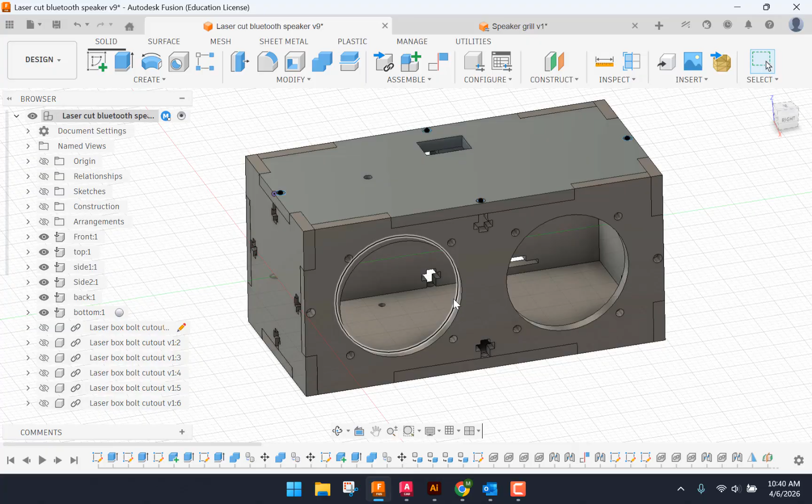We're going to have to use components, and we're going to use parameters to make it easier for us. So this is just going to show you what we're trying to aim for. In this first video, we'll try to cover drawing the front and the side here and getting it set up.

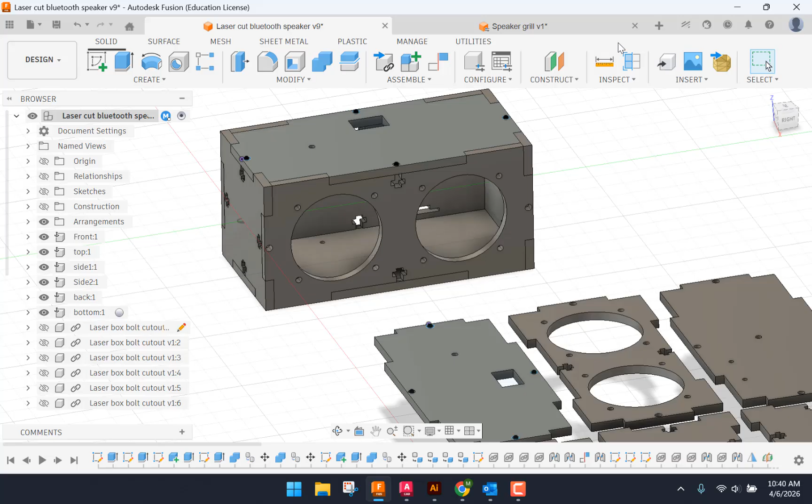So to start, we'll hit New Design and make sure we choose a hybrid design because we're starting a new part and we're making components. First thing I want to do is go to my configure. I'm going to hit OK.

I'm going to add parameters, which is this thing right here. So I'm going to add 3 parameters. The first one, I'm just going to go to plus, and I'm just going to type in ply. This is going to be 0.1875. That is just going to be the thickness of my plywood. And that way, anytime I need to use this, I don't have to type it in.

I'm going to add another parameter for the hole diameter of 0.13. I'm going to go ahead and add one more for the hole distance, and that's going to be 0.1. Not entirely necessary, it's just a nice little thing to make it a little convenient for us.

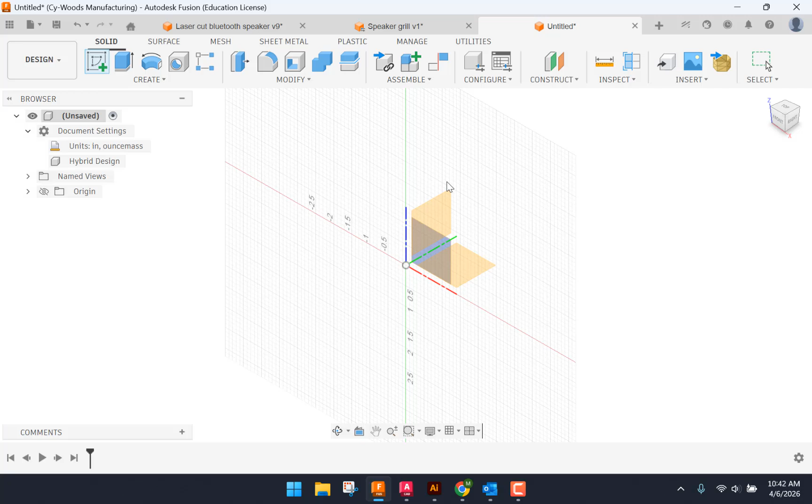So the first thing I'm going to do is start a sketch on the front plane, and I'm going to sketch out this side. The side is going to be a square, so I'm going to go ahead and use the center rectangle at the origin just to make sure I have symmetry. Go ahead and hit D for dimension, and I'm going to type in 2.875. I'm going to use that on both the sides.

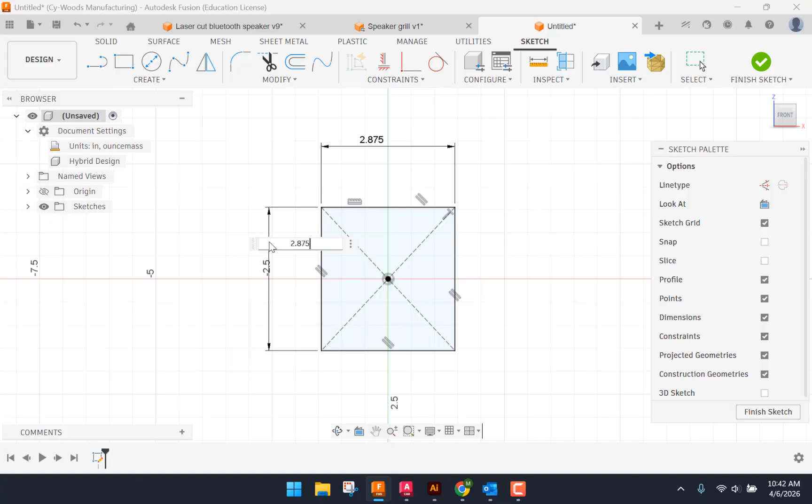I'm going to go ahead and make that little cutout for the box joints in a similar way. Center rectangle, and make sure you find the center point where when it shows that triangle, that means we found the center.

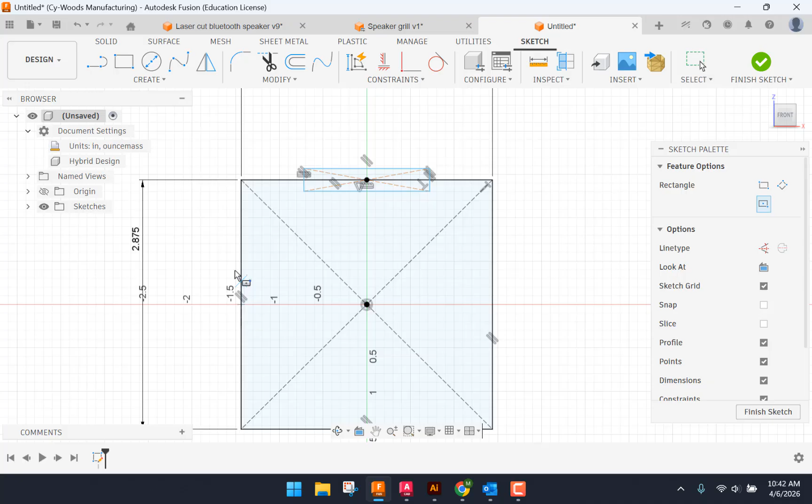I could do this a few different ways. I'm going to go ahead and draw it every time. I could have done a pattern or a mirror since it's symmetrical, but I'm just going to show how to draw it out. So I can hit D for dimension and make the top 1.5, and the distance from the square to the rectangle...

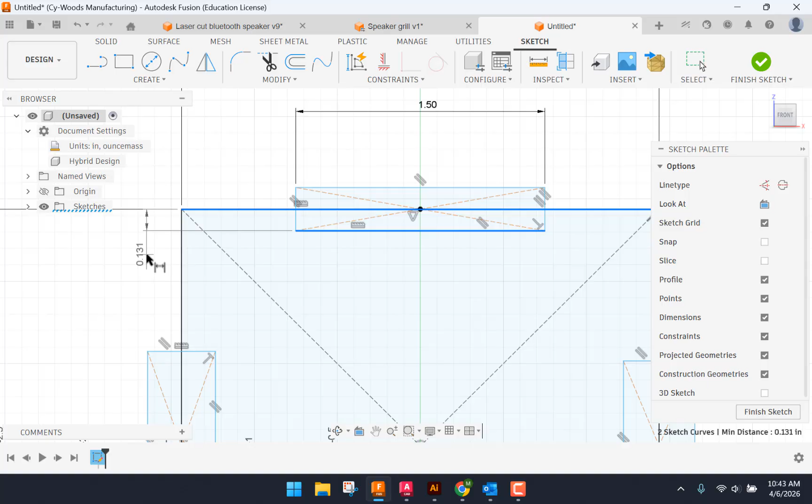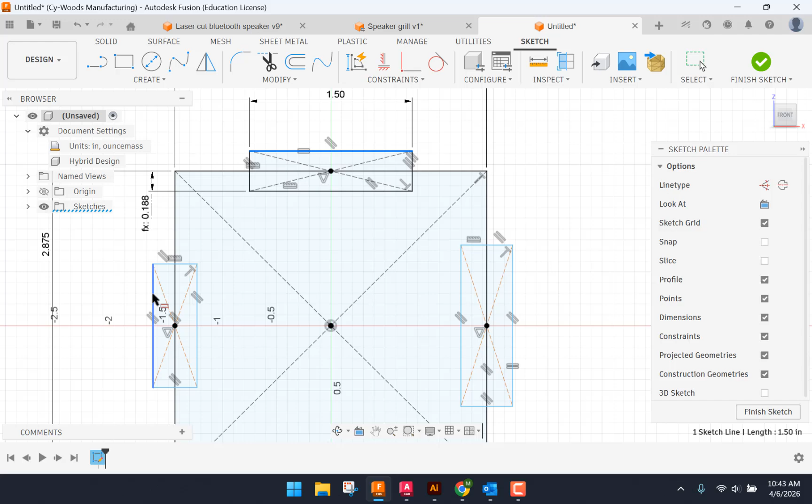Ply. So once I type in P, that pops up when I select it and hit enter. So I need all these to be the same. I can dimension each one similarly, or I can actually just go to the equal, and since this is a dimension, I click on that and I click on a non-dimension one, and they should all change to the same size.

Same thing with the side of the rectangle. I'm just going to keep referencing the top one to the other ones, and that should fully constrain my sketch.

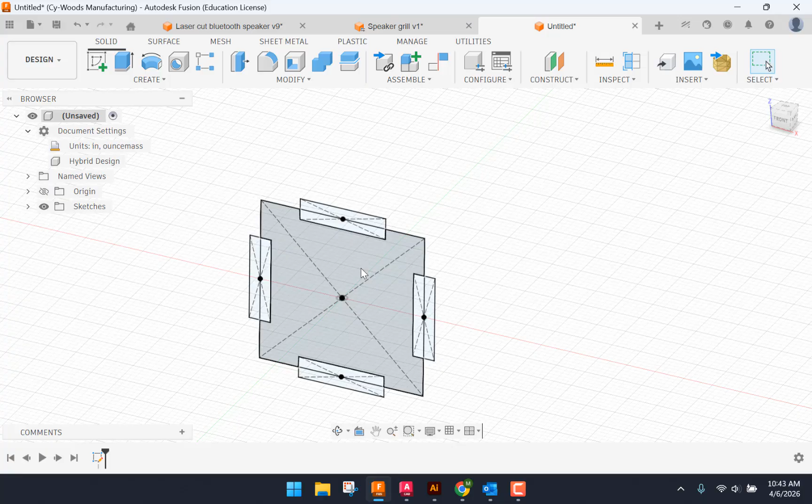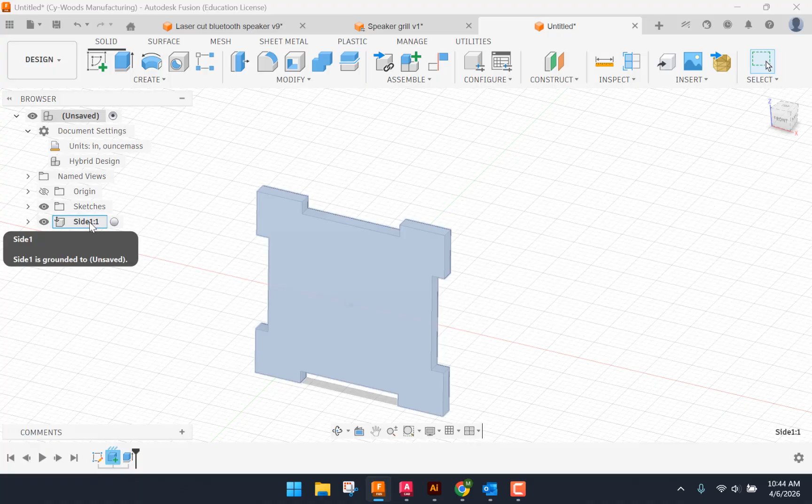Alright, I'm going to extrude this, just this middle part here, to ply. And I'm going to go ahead and hit New Component. So here I have my side. I'm going to go ahead and rename my component 1 to side 1. It's just good to make sure to name things so it's easier to navigate as we go forward.

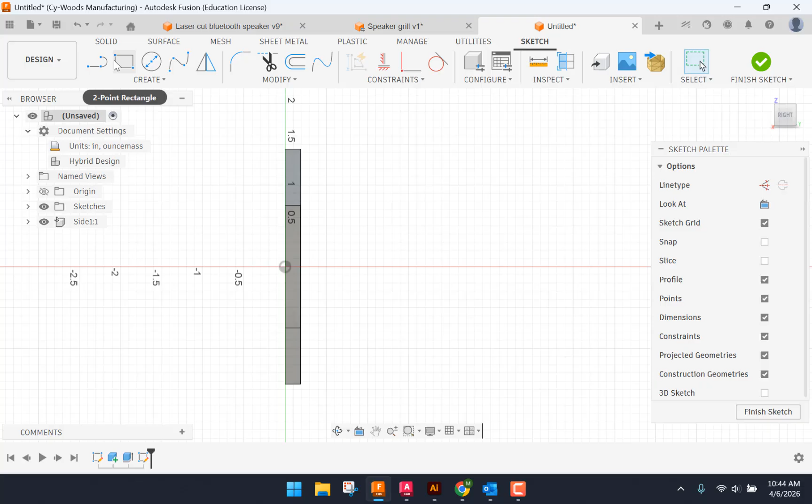Alright, next thing I'm going to do is sketch out the front. So I'm going to put the front on this face here. I'm going to hit Create Sketch and select that face. And then I'm going to do a 2-point rectangle. Make sure I go from this corner and that corner out.

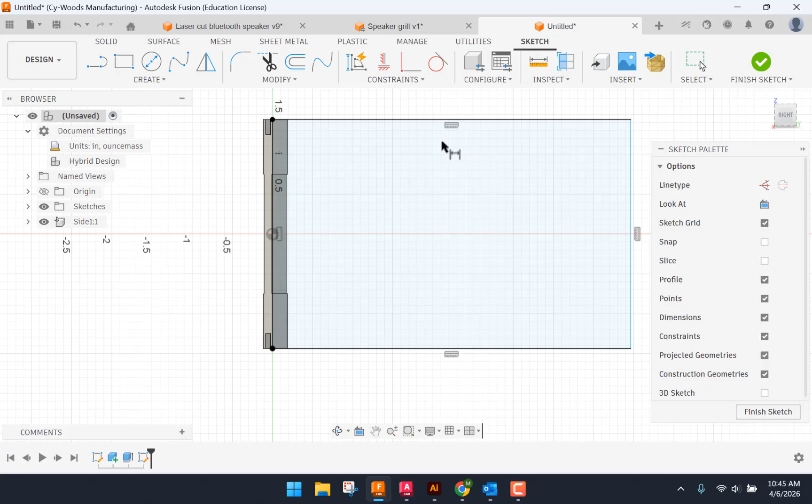Since I can't snap it to that corner, I'm just going to use the coincident constraint and put these two right on top of each other. I'm going to hit D for dimension and dimension this to 5.875.

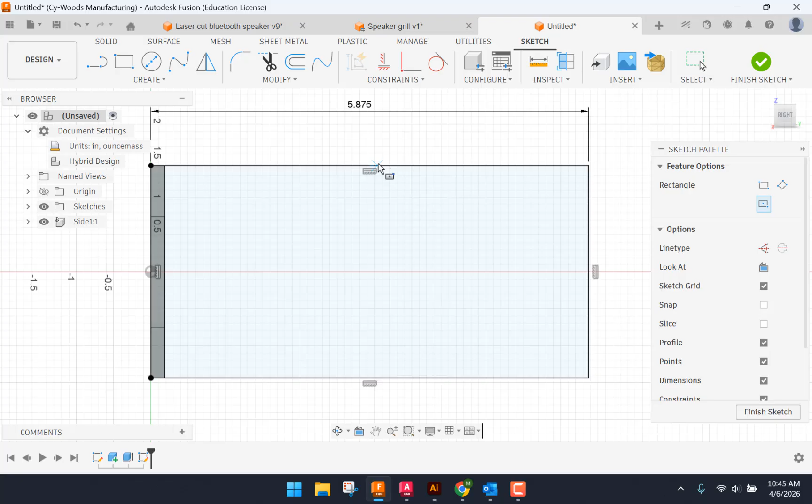Next thing I'm going to do is kind of a similar cutout. So I'm going to go to my center rectangle and make sure I select the midpoint. I'm going to do that on the bottom as well.

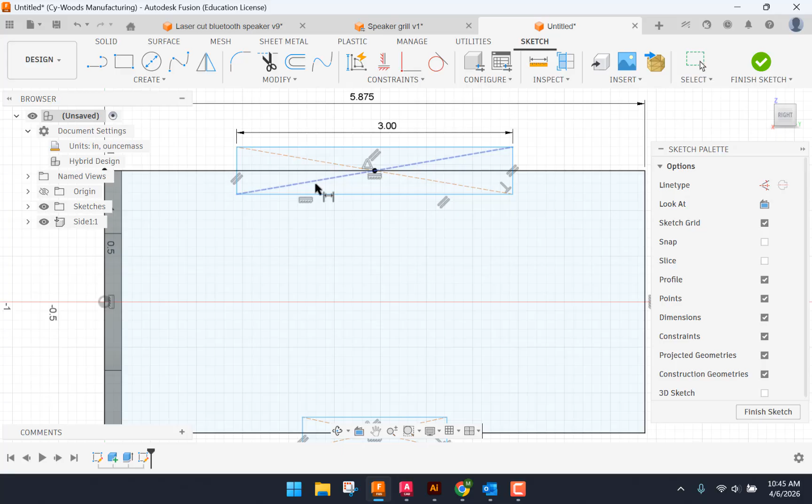So I want this one now to be 3. So I dimension the top to 3, and I dimension this spacing again to ply. So I'm just showing you can do it in multiple ways.

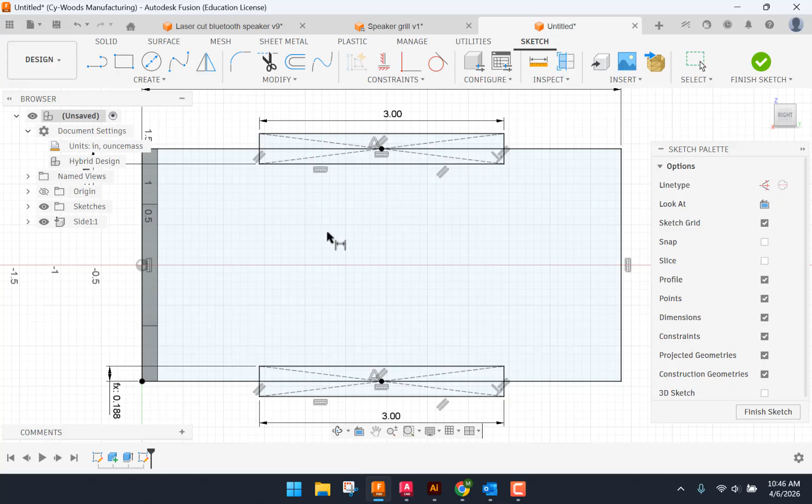So this sketch is done for now. I'm going to go ahead and extrude it. So when I extrude it, I'll just make sure I hit new component, and the distance should be negative ply.

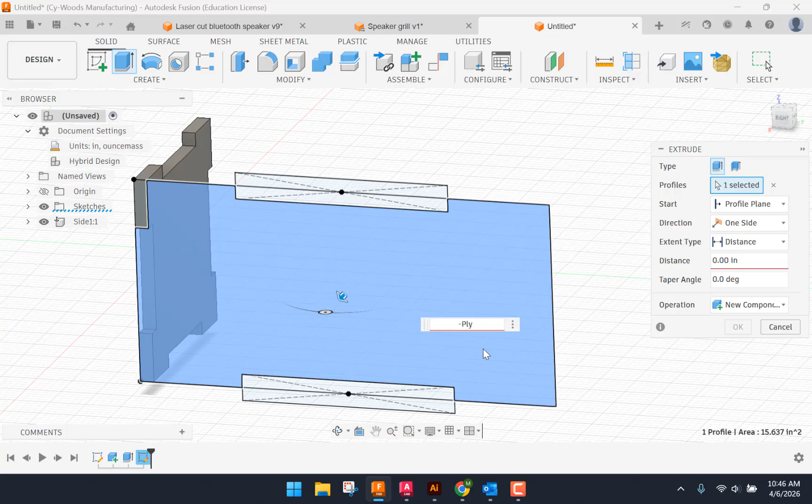So hopefully this is saving us a little bit of time here. The one issue it has, this is not selected, but this one I can't deselect it, which is fine for now. We'll fix that later. So at this point, we have a couple sides drawn out. We're making some good progress.

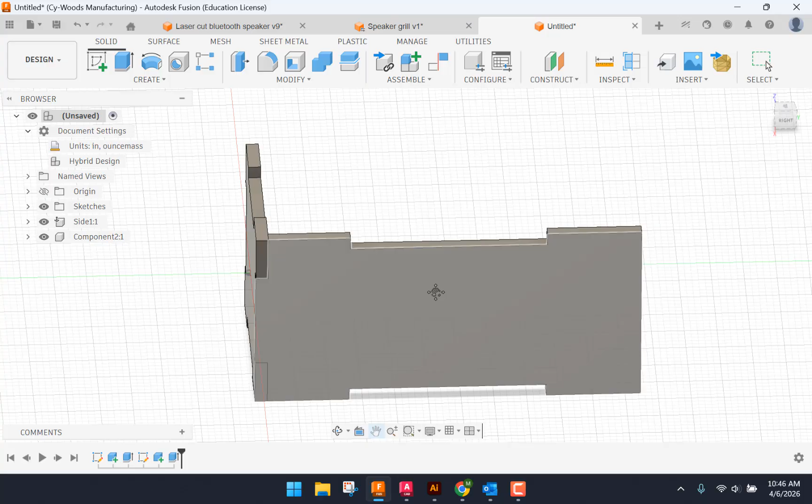I'm going to go ahead and hit save. And here, just make sure you title it speaker and then your name. So I'm just going to call it tutorial.